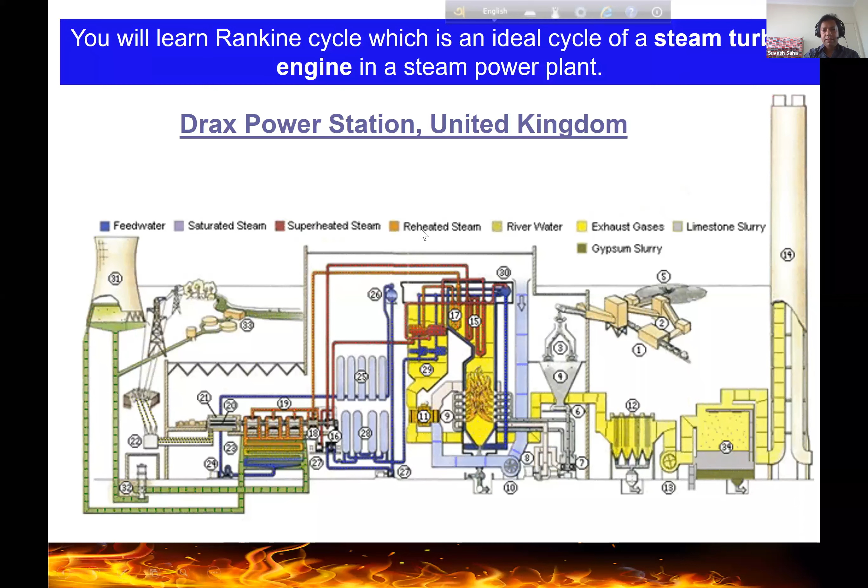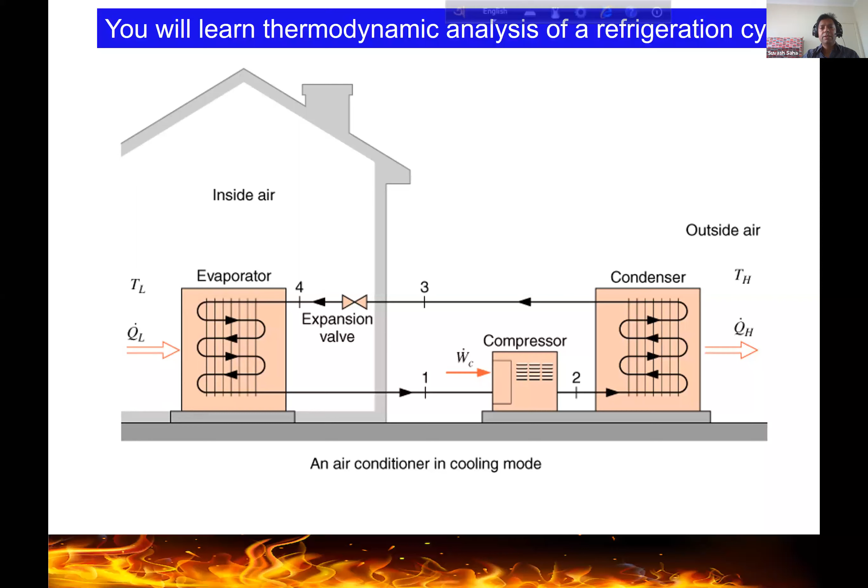After this subject, when you have finished, what will you learn? You will learn the steam turbine engine, the Rankine cycle. You will learn this system, then the gas turbine engine, the Brayton cycle. You will also learn the thermodynamic analysis of a refrigeration cycle, and the engine we normally use in cars. So these things you will learn when you finish this subject.

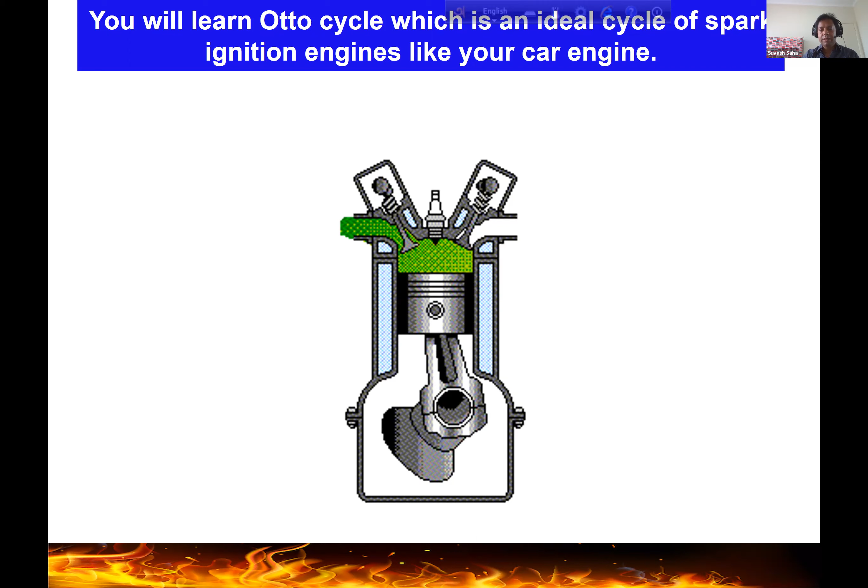Now let's talk about some assessment. The lab report has a weight of 25%. It's a group assignment on air compressor experiment. This date is not correct, it's the last year one, so I'll check it and change it. Before I upload this again, I'll replace this file with a new one. You can also find this date in your study guide, but it is not correct. So from this group assignment, you will get 25%.

There will be 3 quizzes, each carrying 15%. When you finish thermodynamic properties and work transfer, you will have the first quiz. The second quiz is on the first law of thermodynamics, and the third quiz will be on the second law of thermodynamics. The final exam will be 30%.

Sorry, I'm assuming the lab report due date is different. Yes, it is last year's date, 4th October. Ah sure, yeah, all right cheers. So not this one, I'll change it. Okay, thanks.

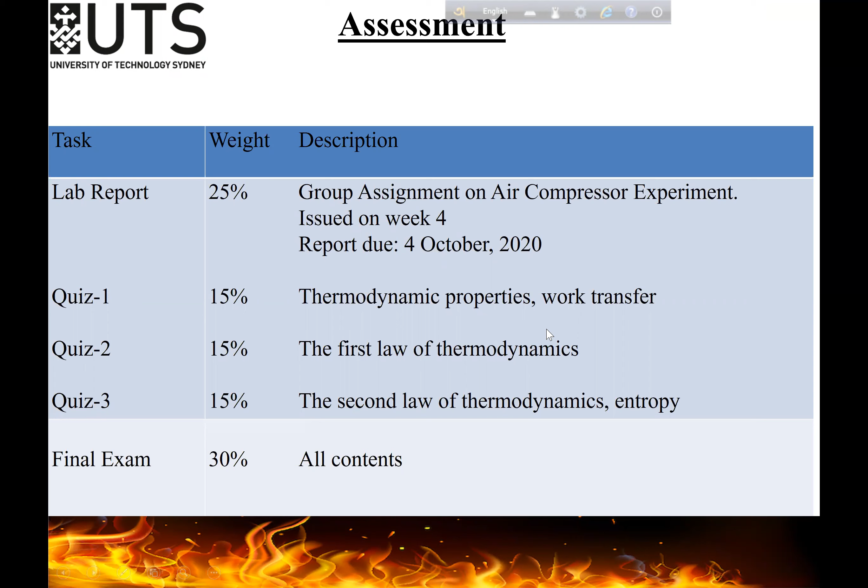Now this is the book I will mostly follow. If you can buy this book, or if you can't, this is still the book I mostly follow. Sometimes we give you problem numbers you have to find in the book, so it is wise if you can get it. I think it's the same version as last year, they did not change the edition. So if you have the old book, that's okay. Or a soft copy, if you can find one, that's cheaper. If you buy the soft copy, that is also okay. I think it's also available in the university library.

Now the objective of today's lecture. We'll introduce you to the pure substance, what is called the pure substance, and discuss the physics of the phase change process. This is a very interesting phenomenon. We actually learned this maybe in high school, but here we learn more. We'll also illustrate the PV graph, the TV graph, PT graph, and the PVT diagram. That's a bit complicated to see because it's 3-dimensional: pressure, volume, and temperature. This is actually 3D and very hard to explain, but it's easy to do as 2-dimensional, like PV or TV or PT.

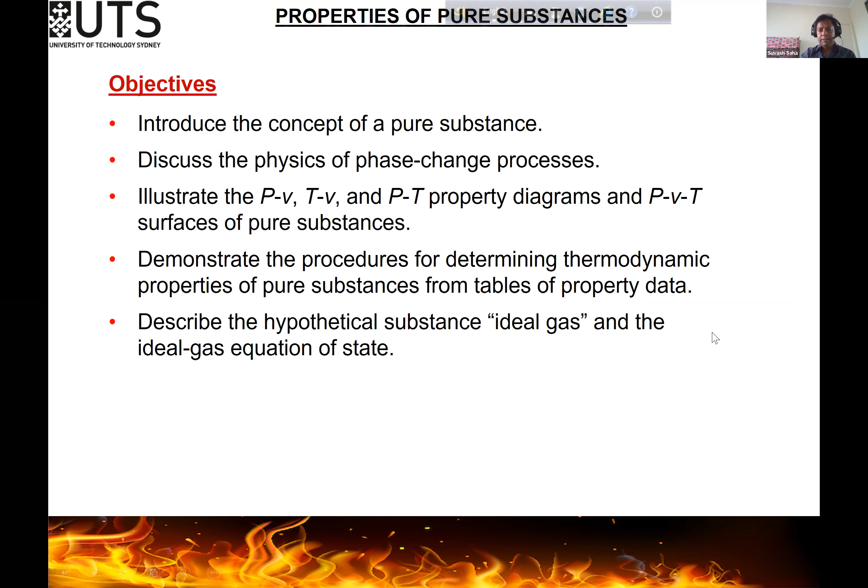And if you have a liquid and its vapor state together, that is also a pure substance.

What are you talking about in the chat? UTS email is down and I could not reset my password. Oh really? Yeah, that was me, that was for I couldn't reset my Zoom password, that's why I'm logging in this way. All right, thank you.

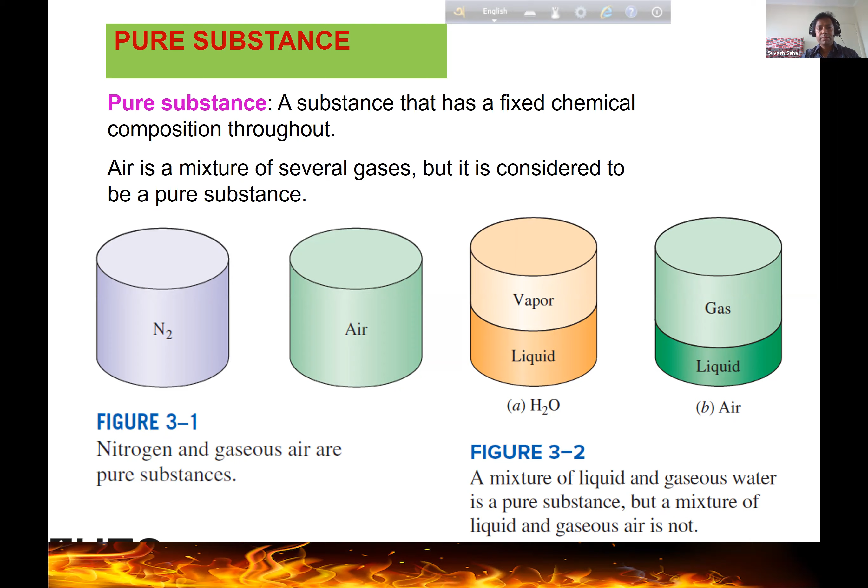Now, what are these three states? If you have some understanding of molecules, it's good, you will understand, but if not, don't worry, it's not complicated. For the solid state, take water as an example. In ice, all the molecules are very regular, organized, and close together. They don't move, just stay in the same place. That is called the solid state.

But in the liquid state, the molecules start moving slowly, though they still follow some pattern and stay close to each other. That is the liquid state.

But in the vapor state, the molecules are dispersed from each other, with no pattern, just going here and there. That is called the vapor state. So that is how molecules behave in the different phases.

If we have a little understanding of this molecular behavior, it is easy to understand, but it's actually not very tough normally.

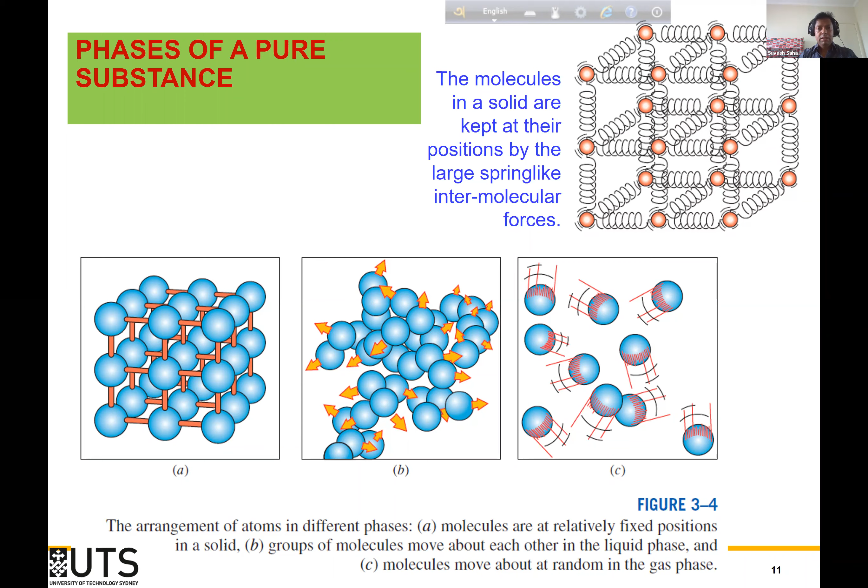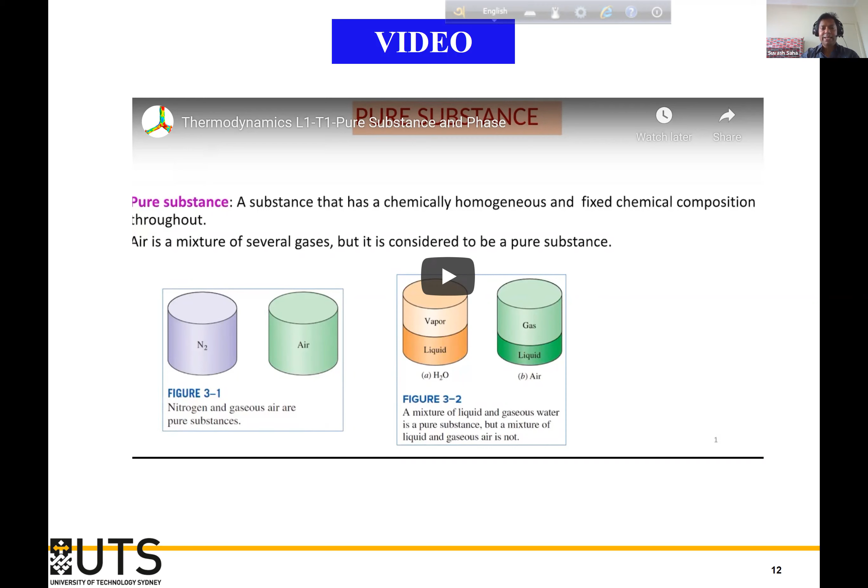This is a video of what I already told, so just follow this one. Is anybody saying anything? Okay, so you can review what I've told until now. There is a small video we created for your better understanding.

Now, next is the phase change process of a pure substance. I can give you an example using water, the total picture of water, and then focus on this.

If you consider water, what is its solid phase? Its solid phase is ice. The temperature when it changes from ice to water, that saturated temperature, is 0 degrees Celsius.

Before 0 degrees, what happened?

So that is the ice state. And if you heat it, the ice starts melting. When it becomes melting, the temperature will stay the same until the whole ice is melted.

Then it starts rising. The temperature starts rising. If you keep heating, the ice becomes fully water. If you start heating it, the temperature will rise to like 100, and when it becomes 100, the saturated temperature of water, that's when water turns to vapor. If you still heat it, the temperature will not increase anymore.

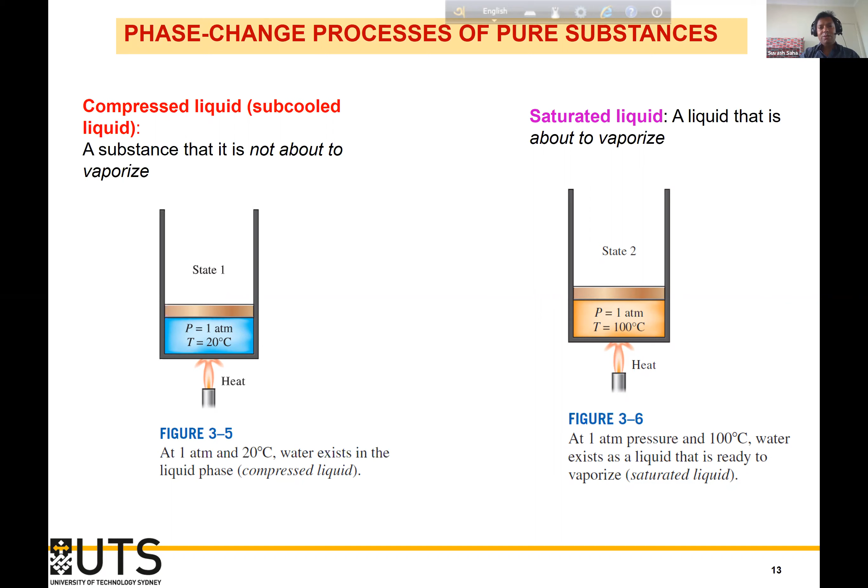So state 1 is called the compressed liquid. State 2 is the saturated liquid, when the liquid is in the terminal stage about to vaporize - that step is called the saturated liquid. Then when it starts vaporization, some part will be liquid, some part will be vapor - that is called the saturated liquid-vapor mixture, because that saturated vapor has the same temperature as the water, meaning they both are the saturated state. Then step 4 is when your whole water becomes vapor. And step 5 is superheated vapor.

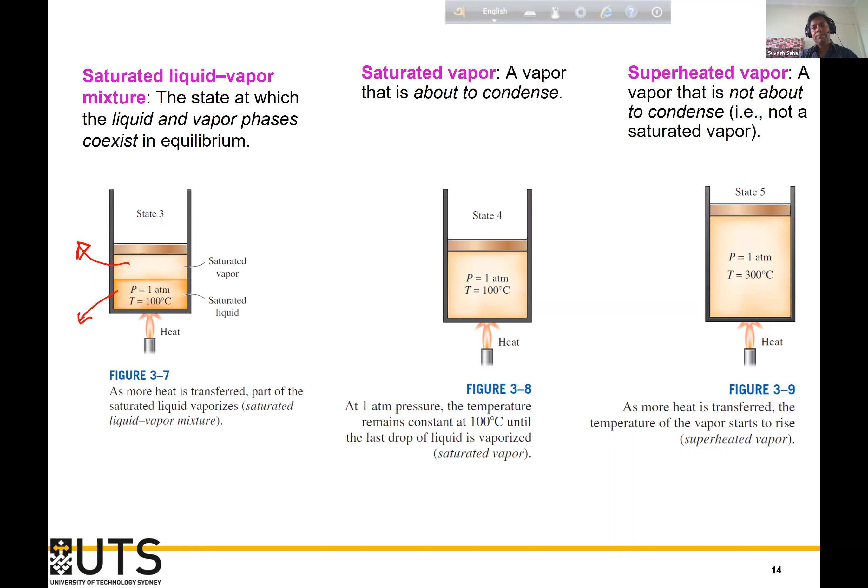This is a very nice figure, I always like this figure. You can see the whole entire process from step 1 to 5. If we reverse it, we have to cool it and we get the reverse process. So this is reversible, and we can get everything back, but we are getting huge energy from there.

Now see here, I forgot to tell you: when it is in a liquid state and you are still heating, what happens? It will actually expand. Expand means the volume increases, and that increase is a bit slow, not very fast. For example, if you have a container like this, this is the fluid, for example this is your 30 degree Celsius. But when you have like this, maybe it is 90 degree Celsius, you have a little bit more volume, so this volume increases.

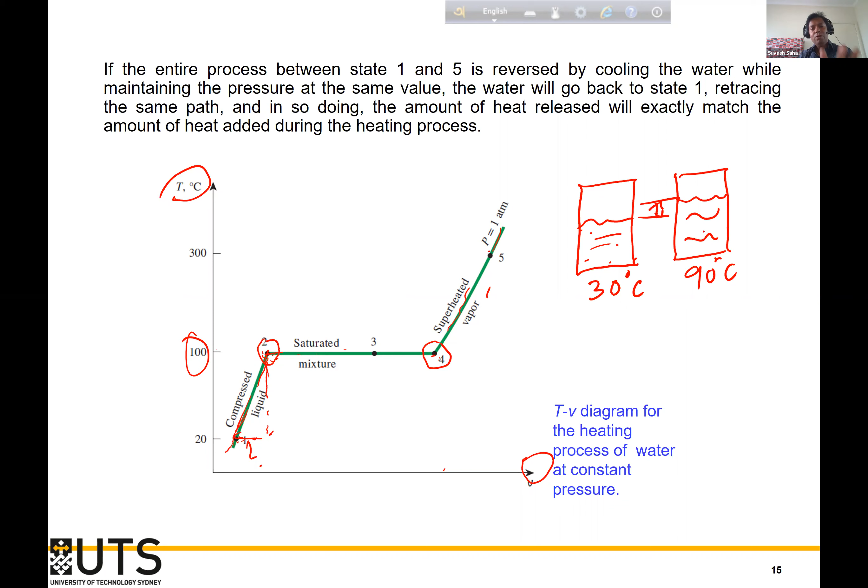I'm just repeating one more time. So here we have a liquid which has 20 degrees Celsius, and then we are increasing the temperature. It expands slowly, also increasing the temperature, going up to 100. That is the saturated temperature for liquid, and it becomes the saturated liquid, because this liquid is about to vaporize. So then it starts vaporization, and it is a mixture of saturated vapor and liquid.

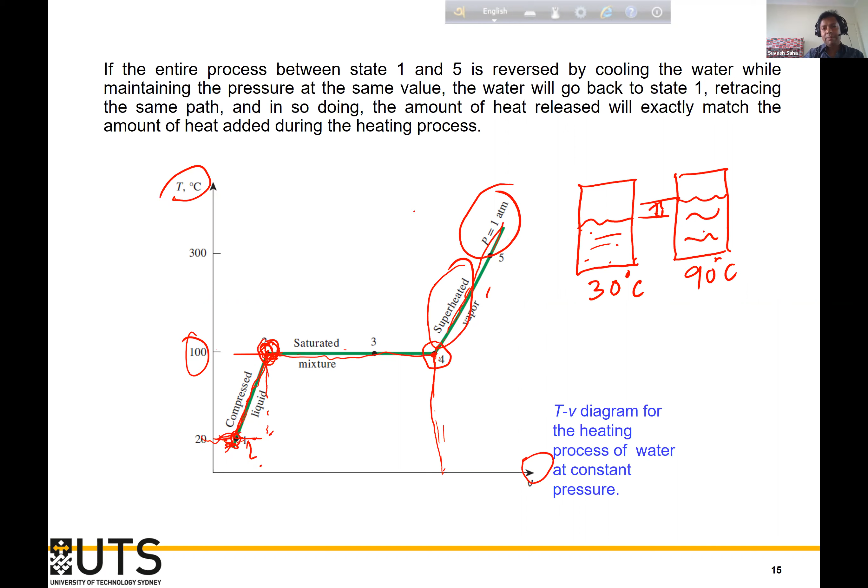But you can see everywhere we have the same pressure. We are not increasing the pressure - pressure is the same, 1 atmospheric pressure. If we change the pressure, it will be changed.

For example, here you can see the video - in the video you see the blue, and then it changes color. You can see from here to there. This is the saturated liquid, then this is the middle state, and we have the saturated vapor here, then becoming the superheated. So this is at 1 atmospheric pressure. When we are heating it, keep heating, so we are getting this.

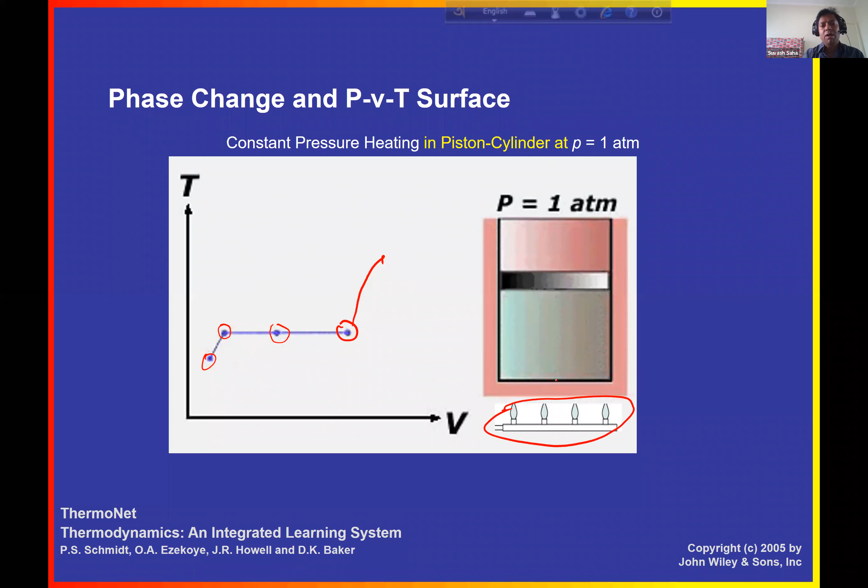But if we change the pressure, what will happen? Instead of 1 atmospheric pressure, if we give 2 atmospheric pressure, what happens? So this figure shows - this one is 1 atmospheric pressure, and this one is 2 atm. Okay, so you see the change.

Maybe if it is 100 - it's not 100, something more than 100. So if you increase the pressure, you need more heat to vaporize. The more you pressurize, the more heat you need to vaporize the water. So that is the relationship between temperature and pressure, to change the phase.

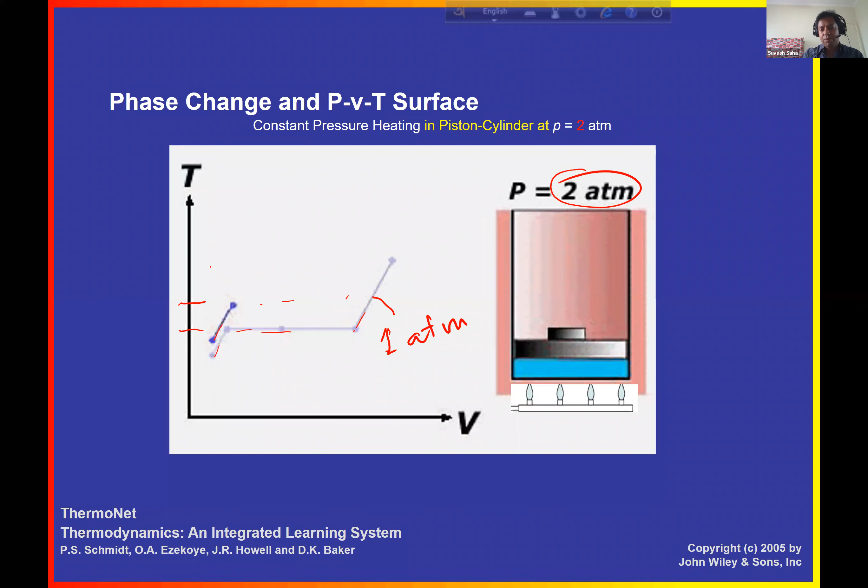So that is very important. There are a lot of other curves - I'll show you later. So this is the video of what I just told you until now. You can listen here. Let's play one and see how it goes.

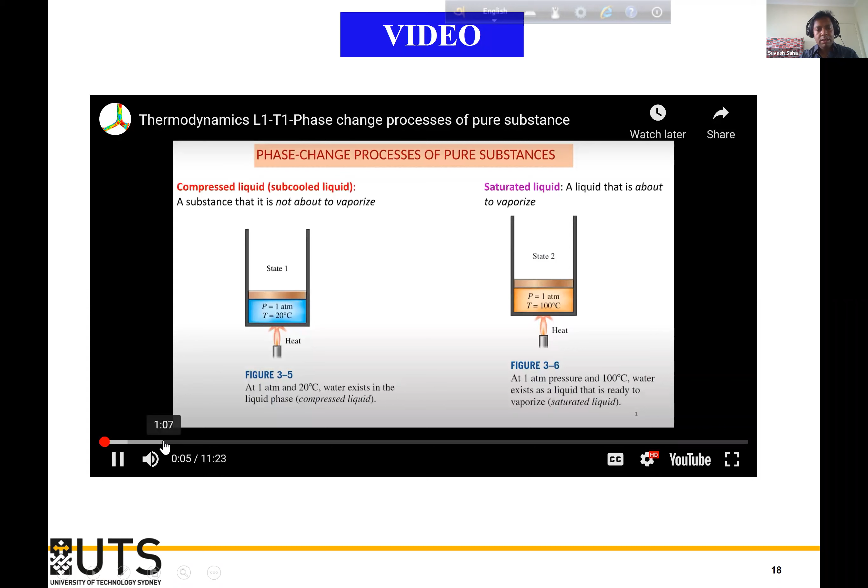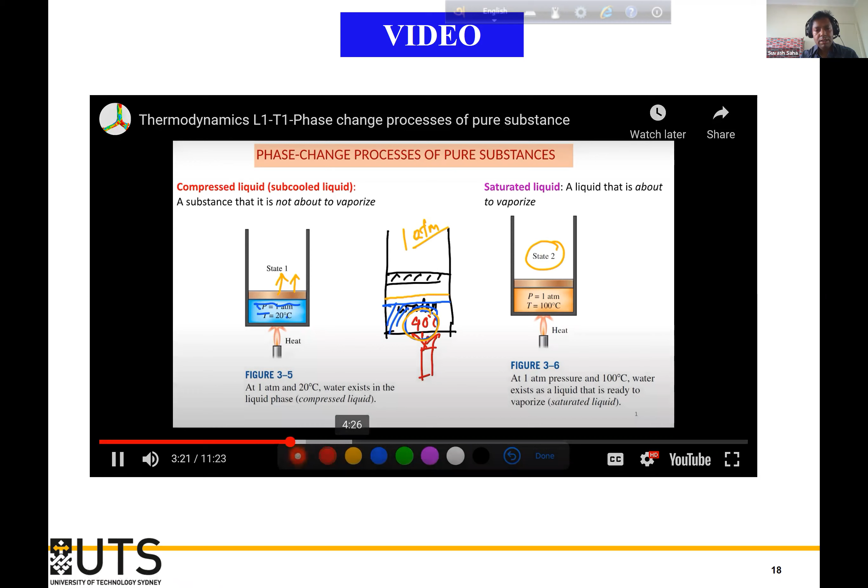All right, so that is the video. If you watch the video, you can learn what we have discussed here. You can get some more information as well.

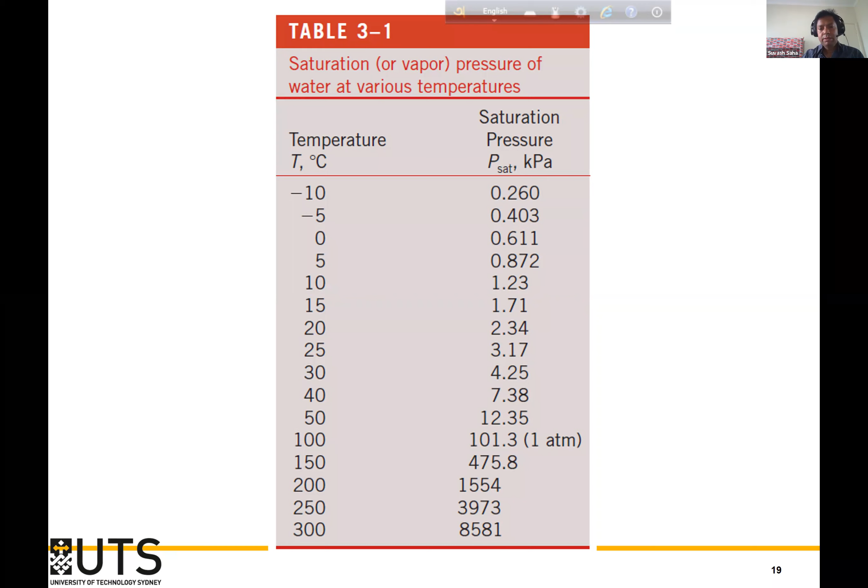Now there are some definitions here. What is latent heat? This definition is needed to calculate some thermodynamics properties. Latent heat is the amount of energy absorbed or released during a phase change process. So that is called the latent heat.

So the latent heat of vaporization, or the latent heat of fusion, from solid to liquid. That has some latent heat, and there is some latent heat. So two states have two different latent heats.

So the latent heat of fusion is the amount of energy absorbed during melting, when it changes from solid to liquid, like ice. The amount of energy absorbed during melting is equivalent to the amount of energy released during freezing. So it's the same. The amount of heat or energy it needs, and when it goes back to that state, it releases the same amount of energy.

Now the latent heat of vaporization: the amount of energy absorbed during vaporization is equivalent to the energy released during condensation. So the amount of energy it needs to convert water to vapor, you get back the same amount of energy when it comes back from vapor to water during condensation.

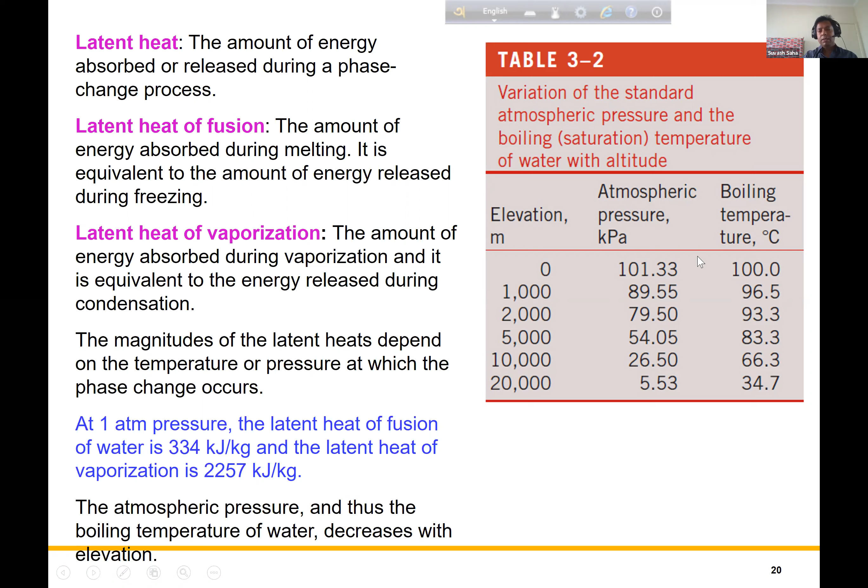Now this is the property diagram for the phase change process. I want to explain this a bit. In the vertical axis is the temperature, and the horizontal axis is the volume.

Now see here, for example, when the pressure is 0.01 megapascal, the chart looks like that. Here you have the liquid phase, here the saturated liquid, and here the mixture of saturated liquid and saturated vapor, and here the saturated vapor and then superheated. The volume change from here to there is the highest for all the pressures considered in this case. So that is the maximum volume we get for 0.01 megapascal pressure.

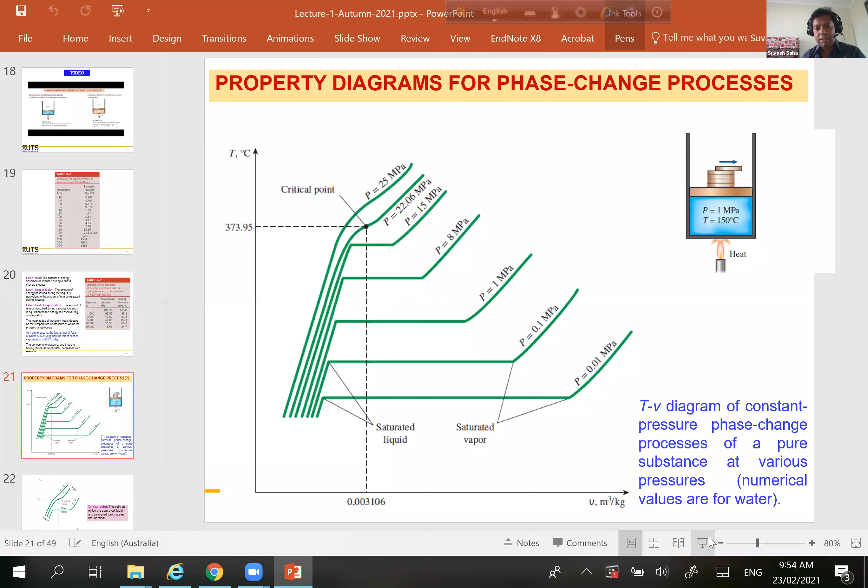So the more pressure you are giving, the more temperature you need. But at a certain point, when it's coming here, then no further volume change you are getting. Actually it's all the same state, like a liquid state. It is not changing.

So now if we connect all these points here, here, here, here, here, here, then we'll get a dome shape curve. I'll show you later on. So for pressure less than the critical pressure, if we call this one as the critical pressure, then less than the critical pressure we have phase change. But more than the critical pressure, there is no phase change.

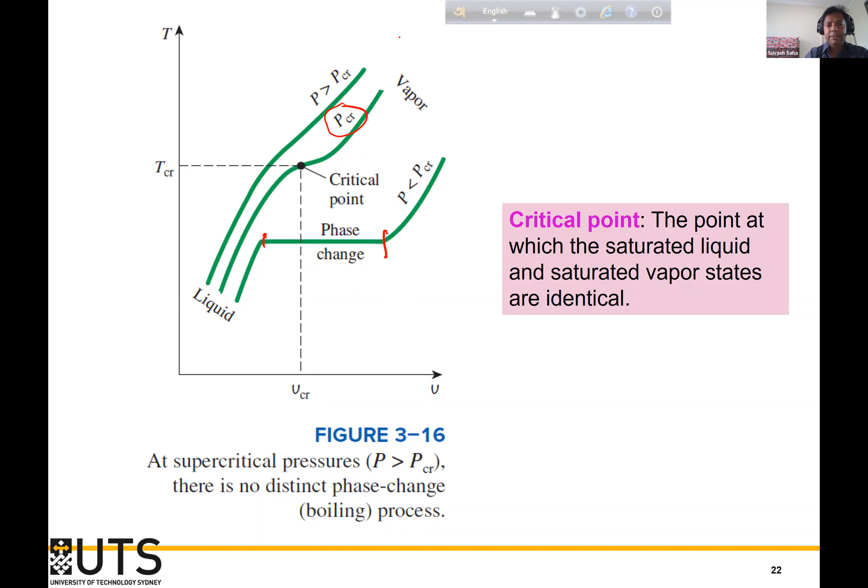The same step, this curve, and the second curve, yes, this is the one I told you, if you add all these points here, yes, so you see this is the curve. So it is very systematic, it is not very complex. This subject is not complex at all. If you follow my every lecture, at the end you will be Superman in thermodynamics. It is very, very easy to follow. Step by step it is connected. You need to just follow it. If you miss somewhere, you'll be messed up.

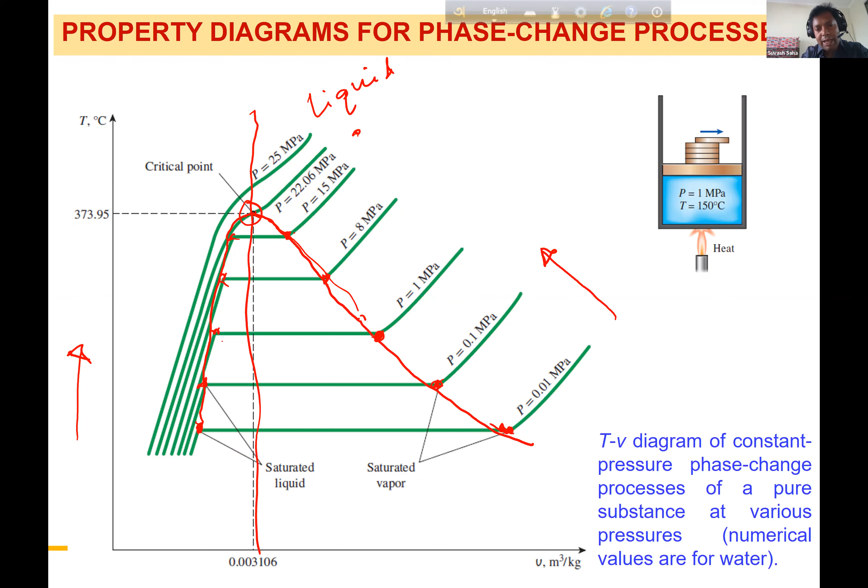So if you get this connection, then it will be easy to understand. But if you only see that curve, sometimes you will be lost from where it comes. But if you see this figure, then it's easy to understand. We can divide this part: left part is liquid, right part is vapor. But it's not all vapor, it's just some vapor, some liquid. But after this point, all are vapor. So this is the saturated vapor line, and this is the saturated liquid line.

So still we are doing the temperature versus volume curve. That means for a fixed pressure, same line, but if you change the pressure, we are getting from P1. If P2 is greater than P1, we are getting here, and we are getting here. So that means by changing the pressure, we are getting different saturated vapor points and saturated liquid points, and then we are getting the smooth curve.

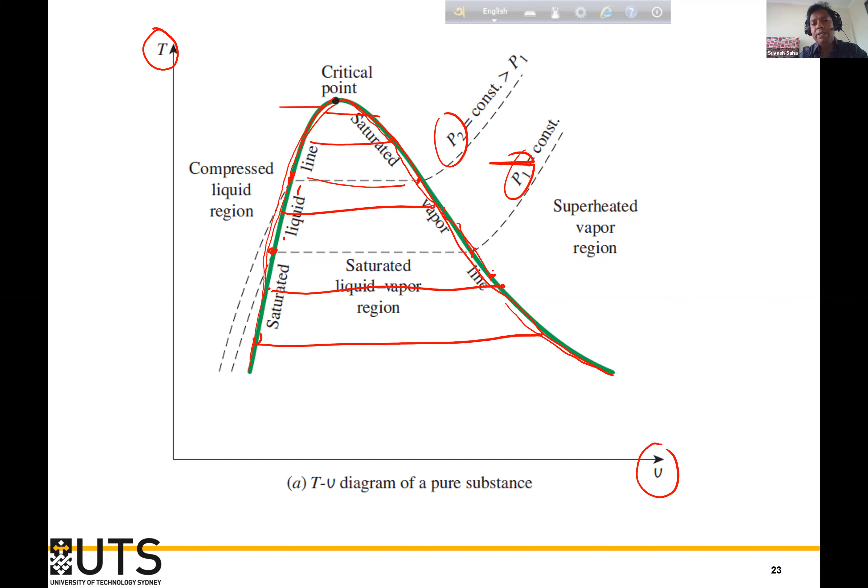So this actually, without further doing an experiment, if you have this curve, you can easily get the point based on any pressure you choose: what is your saturated vapor volume, and what is your saturated vapor temperature. You can easily calculate for different pressure. Actually, you have a table for that, so it's easy to do that. I'll show you later on.

Okay, just here I want to stop and ask you one question. Some feedback, is it okay? Am I going too fast or slow, or do you understand what I'm talking about? Do you have any comments? Can you give me some feedback?

Well, your speed's all right. Yeah, I think it's good. Good, all right. We're all here, by the way. We know you're feeling like we're not here, but we are here. Good, thank you. Now I'm feeling I'm not alone. Okay, that's good, yes it is perfect. Thank you.

Now what we'll do is pressure versus volume, so that is different. Now we'll change the temperature. How do we do that?

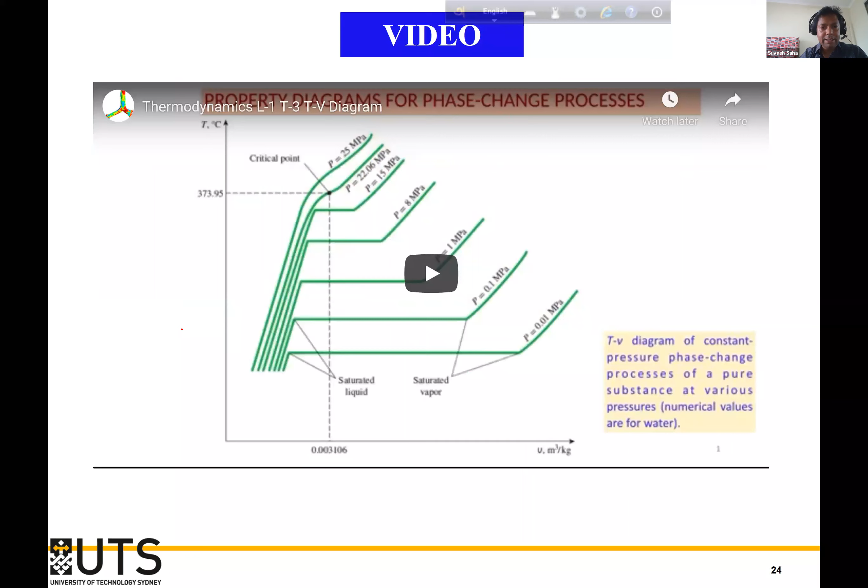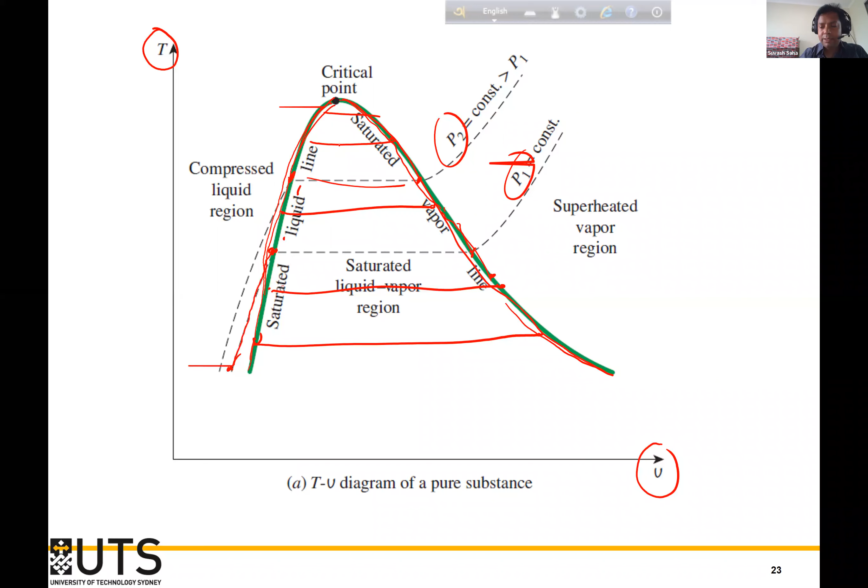So both are different, but the thing is, for the heating one, you can see - for different pressure, temperature is increasing. Sorry, for fixed temperature, the pressure is reducing. So that is the importance: if you increase the temperature, you need more pressure; if you increase the pressure, you need more heat. So that is the relationship between temperature and pressure.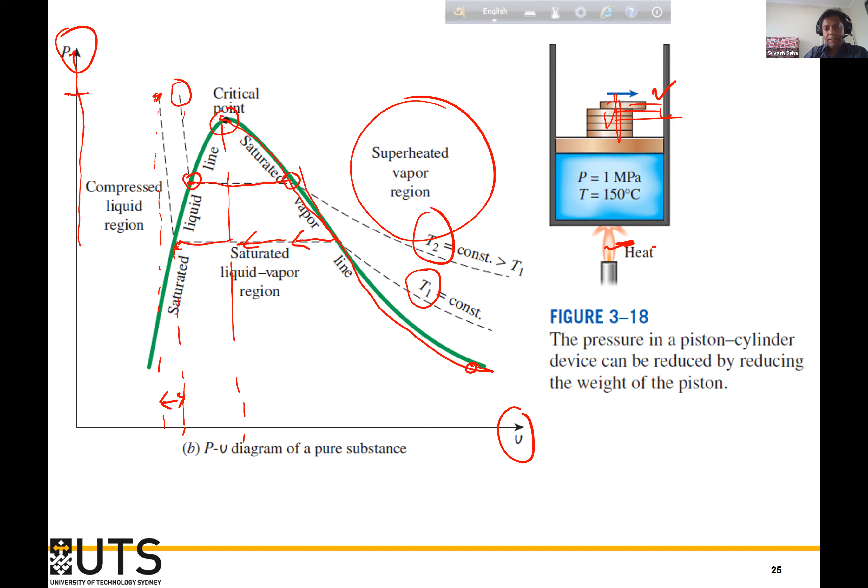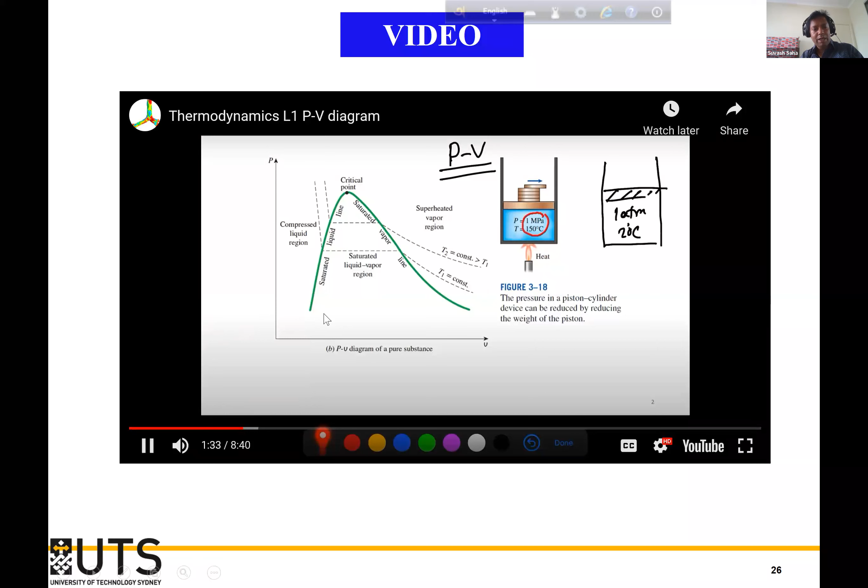Okay, and we have discussed this further here. So you can, when you see this video - I'm not going to go more into it now, so you can have a look when you get time. I split it into different sections, and we made the video.

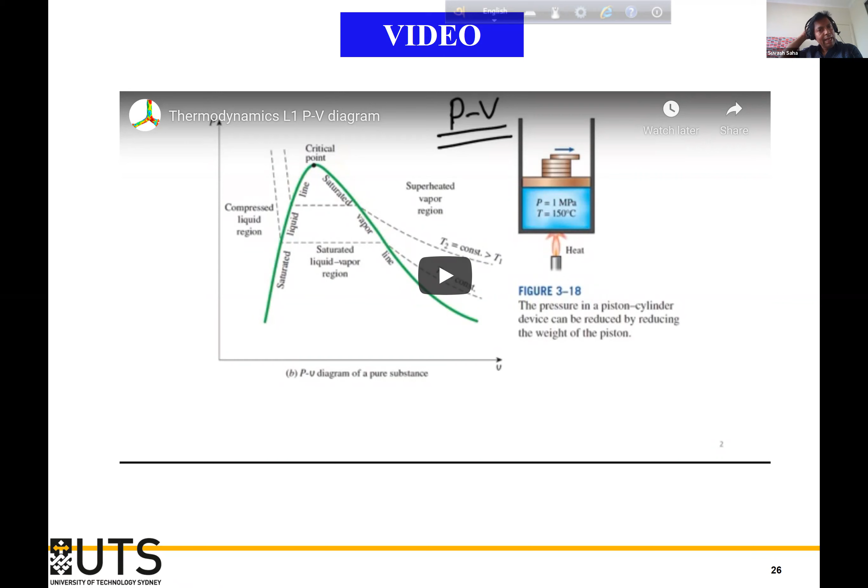Now this is a very interesting diagram, I like this diagram very much. This actually classifies all three states. If we consider, for example, water, this is the solid phase here. This is the PT diagram - that is the pressure, this is the temperature. As I said, if the temperature increases, the pressure increases, so this is the curve. That is generally the case.

But the solid - we are always giving the example of water, but there are some other liquids as well, so they don't behave like water, it should be different. But if it is water, this is the solid phase, this is the vapor phase, and this is the liquid phase. So now, these three curves: this is the curve for vaporization - above this side is vapor, this side is liquid. This is the sublimation line, the line between the solid state and the vapor.

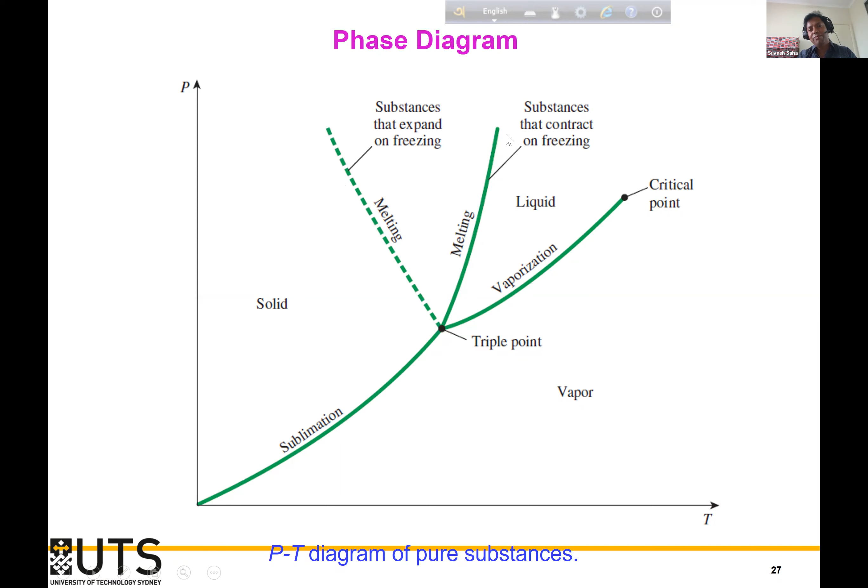Normally there are some other things in between, so it is a long one. Now what we can see: substances that contract on freezing follow this line, and substances that expand on freezing, for example ice - ice actually increases in volume when it becomes ice from water, isn't it? The volume expands. So the melting line is this. But there are some other things that actually contract on freezing, so this is this line. That is what we discussed in this video, just for this diagram.

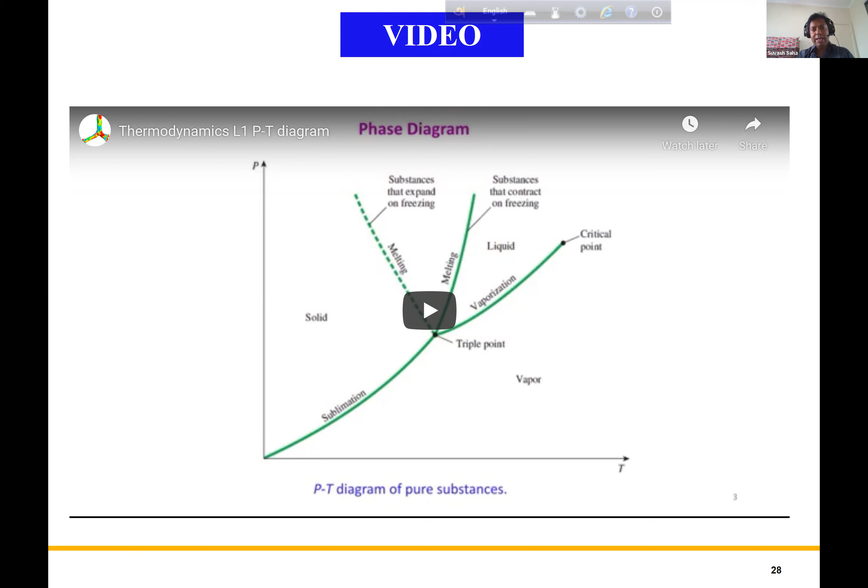Yeah, this is the most complex thing. I don't want to spend time on that because you have to have a three-dimensional mind to understand this figure. This is actually the PVT diagram all together, with the three dimensions: temperature, specific volume, and pressure. This side is temperature, this side is specific volume, this side is pressure. So what is happening here? All things are explained in one diagram.

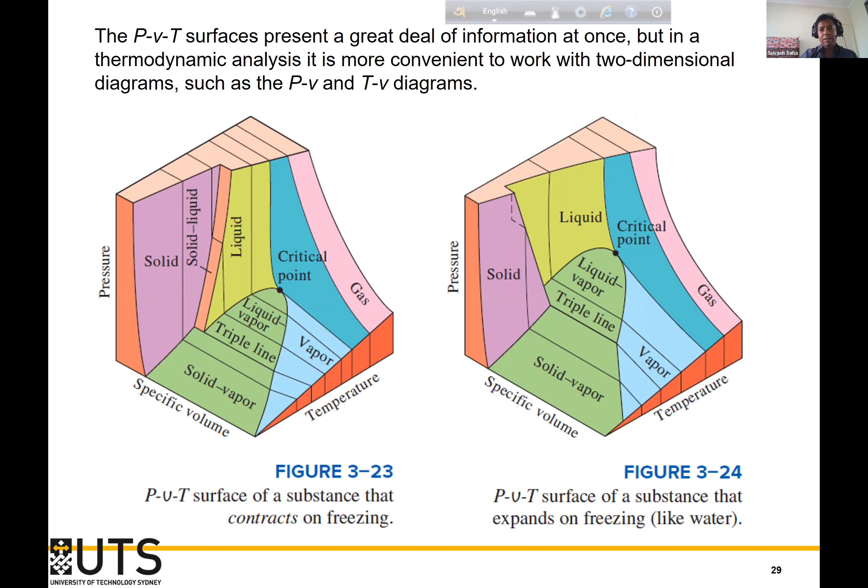I found a very nice video on YouTube and I just put it here, because they explain this in a very nice way. If you see this video, you will understand how they are doing it, it's exactly the same thing here. It was made at IIT India, and this professor explains it very nicely. That's why I put it here, if you want to understand more. But I don't think it's very important for you to understand, since 2D is better and we understand it better. But if you want to see it all together in one place, then you can see this one.

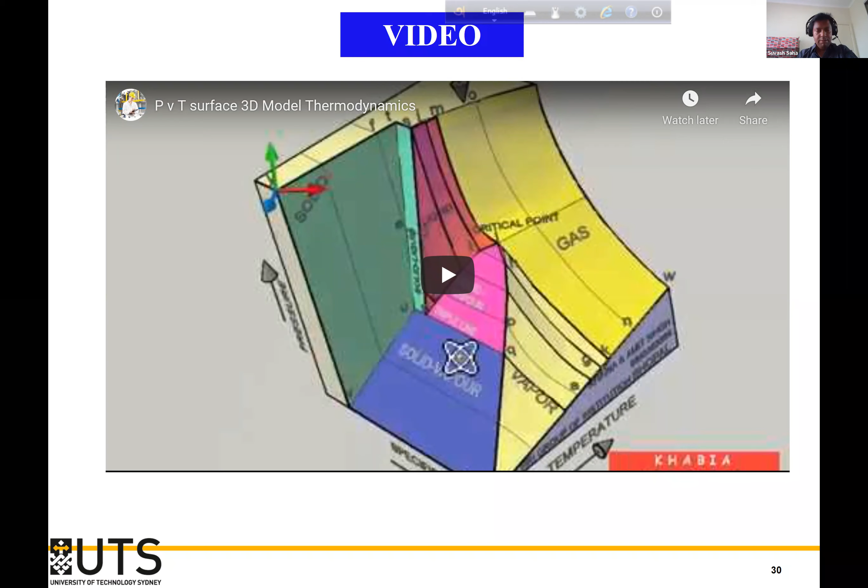Now there is another important physical property, called enthalpy. In thermodynamics, enthalpy is very important, but in heat transfer, no. I also teach heat transfer, maybe next semester you may take it. Next semester I'll be teaching both heat transfer and thermodynamics. Generally heat transfer is offered in both this semester and the next, but this semester they stopped providing it, so it will be next semester. I think most of you will take it, because thermodynamics is the prerequisite for heat transfer. So you have to finish thermodynamics, then you can go to heat transfer.

The main difference between heat transfer and thermodynamics is that thermodynamics deals with static things related to energy, while heat transfer is dynamic with time. For example, a cup of coffee: in thermodynamics, we analyze how much energy it takes to heat the coffee. In heat transfer, we don't need to know that; instead we measure how long it will take for the coffee to cool down to normal temperature. That is why heat transfer is important for that subject.

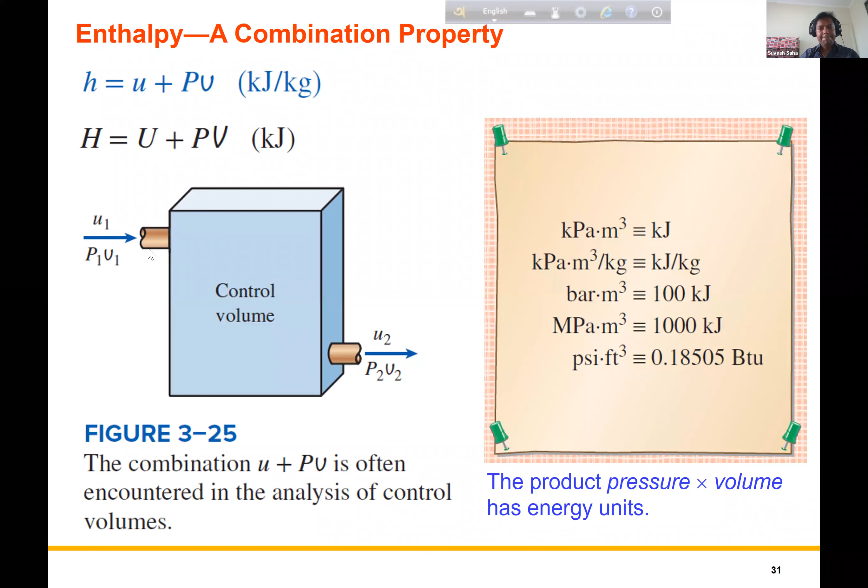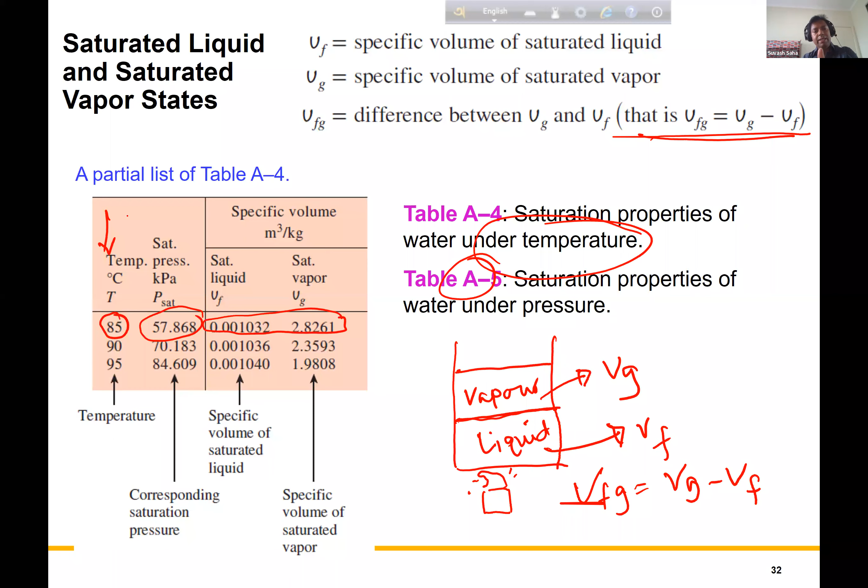Now there is another important thing for the mixture - the saturated liquid and vapor mixture - that is called the quality. This quality is needed sometimes. If you don't know the mass, then you need to know this value of the quality to calculate some other thermodynamic properties. So what is quality? Quality is the ratio between the mass of the vapor and the total mass - vapor and liquid combined. That is called the quality.

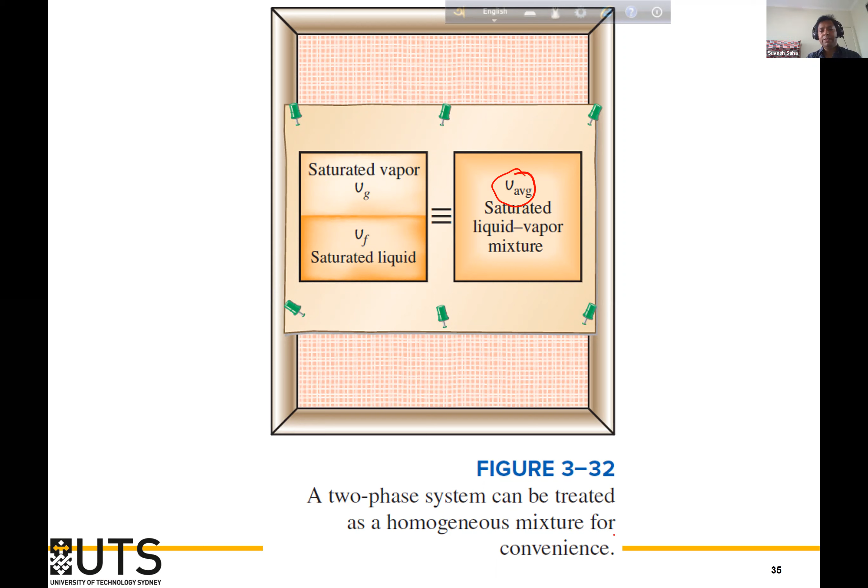So this is some math here, but don't be scared of this, it's not very tough, very easy. I'm just going step by step, then you will understand. So this is the volume - the total volume is the volume of the liquid plus the volume of the gas.

Now if we multiply by the mass, we get the total volume. This volume is the saturated specific volume, and if we multiply with the mass, we get the total volume. And the total mass is mt. And the total we can call the total saturated volume of the mixture - that's called the average volume of the mixture.

Now if we substitute this value here, we get this: Vf becomes mf times Vf, because it's a unit mass, so you have to multiply to get the total volume. We need to multiply the specific volume by mass to get the total volume of the liquid and the total volume of the vapor.

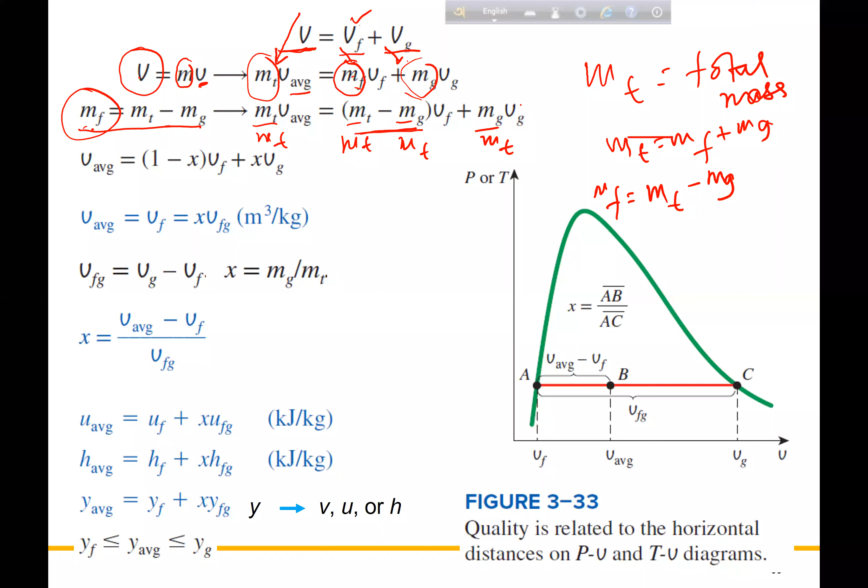Now we are putting in this value for mf, which is mt minus mg. If we put that in here, we are replacing mf with mt minus mg, getting this from here. We put it here, then it becomes this. Now, if we divide both sides by mt, this mt, this mt, this mt, this mt all cancel out. So only V average remains on one side, since mt over mt is 1, and mg over mt, that is our quality X.

So we are getting X here, times Vf, plus - since mg by mt is also X - so now it looks like an equation, right? We are converting this slowly into an equation. There's the equation. Now it should be plus, not equal... isn't it, the average...

V average, this is VF plus X VFG. You know why this plus? Because if we write this on this way, that means if we multiply this VF inside, there should be VF minus X, VF plus X VF. Now VF, and this is VG. This is VG. Now VF plus, if we take the X outside, then it is VG minus VF. Okay, the VG minus VF.

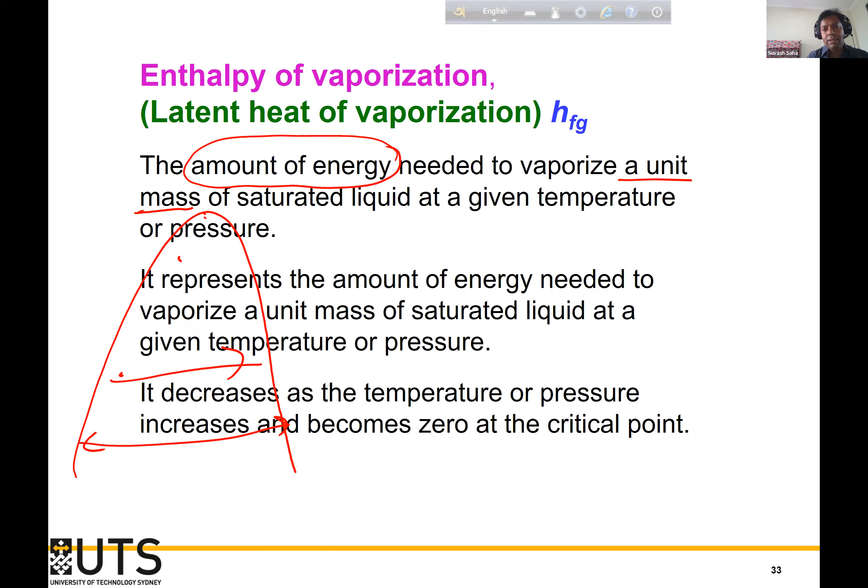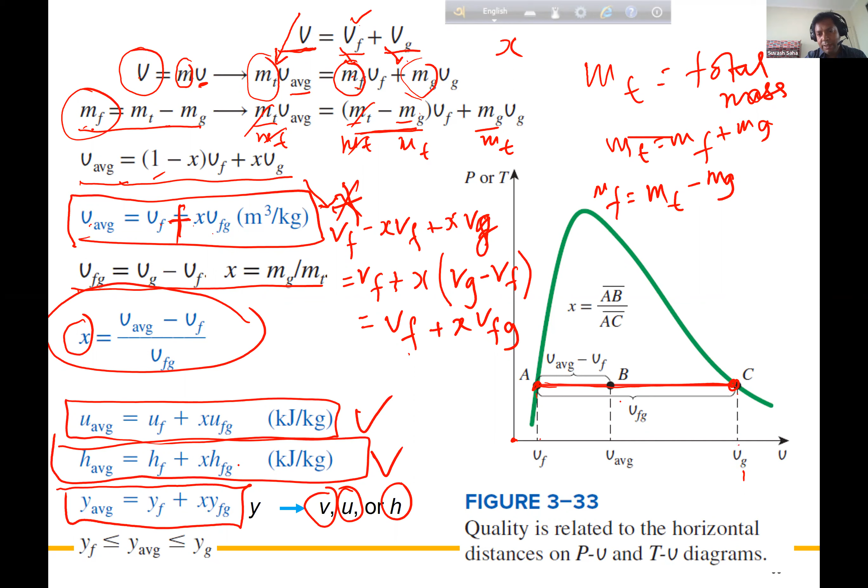All right, so this is the way, and this is the x. X is the AB, okay. So AB divided by AC. Where is C? I cannot see. Sorry, where is AB? So AB is here. So if we have average volume, it's somewhere here. So that means this is called AB, this is called BC. So that ratio, okay. So this is the ratio of the liquid, and this is the ratio of the vapor. So that is to mass. So that mass is giving us this quality.

Let me check some comments. What does letter V present? Is there any difference between the upper and lower V? Yes, upper V is the total volume, and lower is the specific volume. To get the upper volume, you multiply with the mass, and then you get the capital V.

There are some videos for this. I put it here. Now I want to solve two problems. What is the time now? 10:35, we still have some time, so we'll just solve two problems. It's a very, very simple problem.

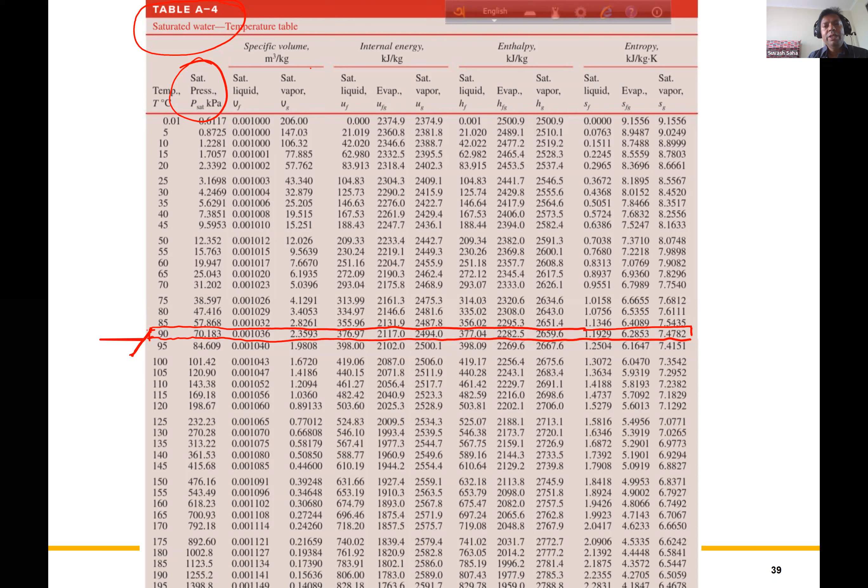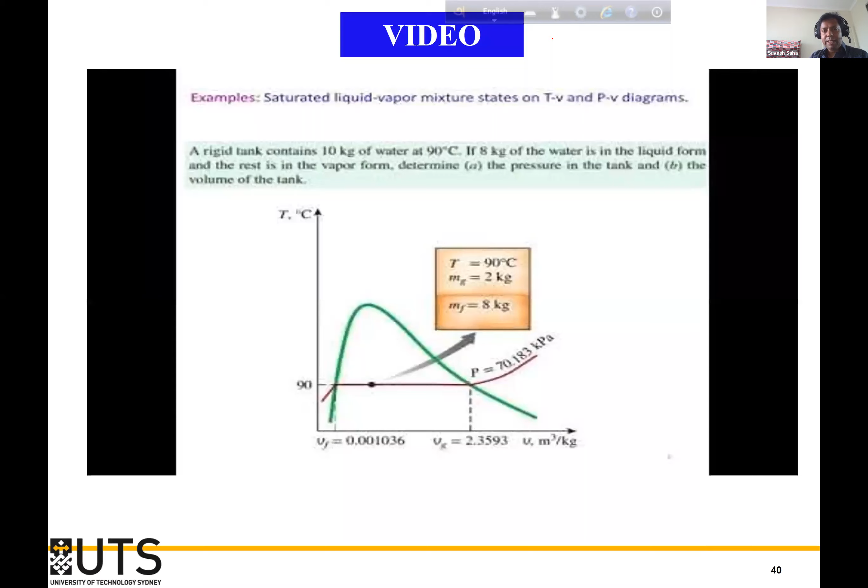We have a lot of other things like entropy, enthalpy, and internal energy in this table. So when you need any properties, we can use this table to get it. That problem is explicitly calculated here, and we actually did other methods too, using quality. If the mass is not given, we also use other approaches, so you can see this video.

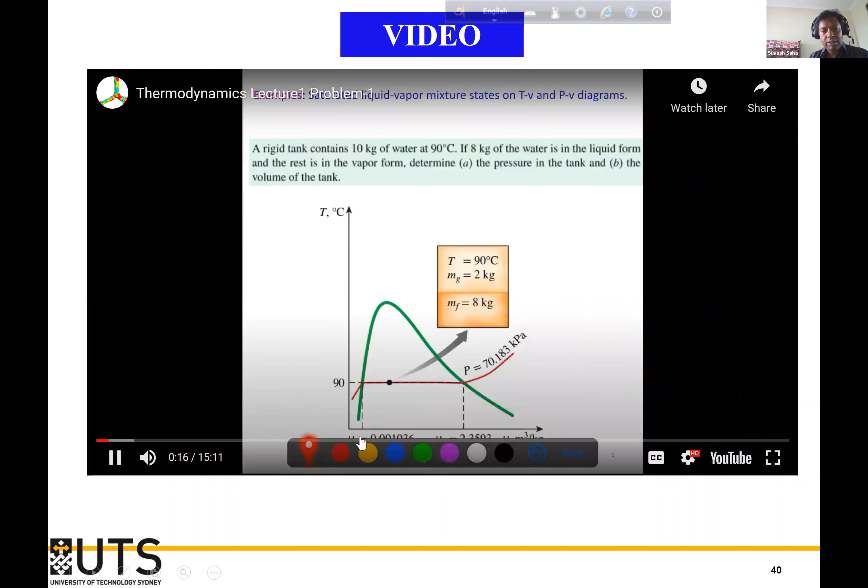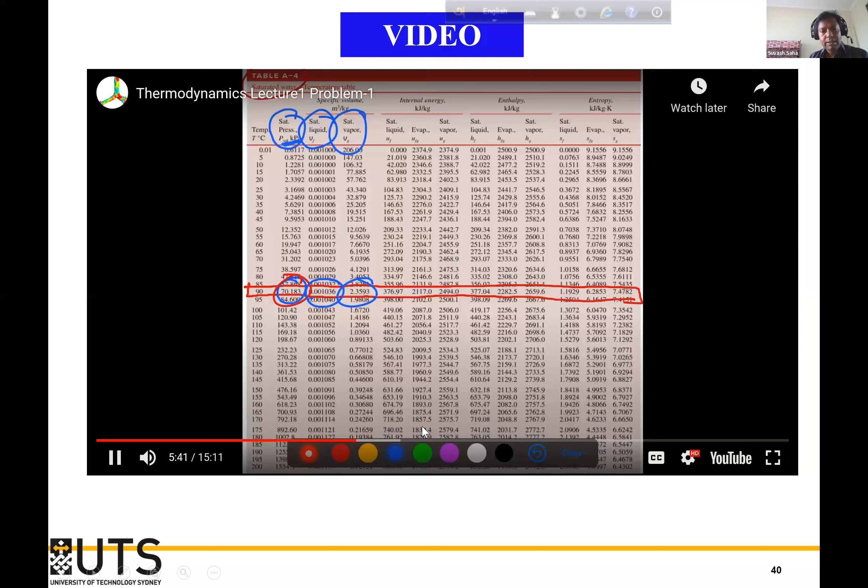In this video, we actually mentioned this method.

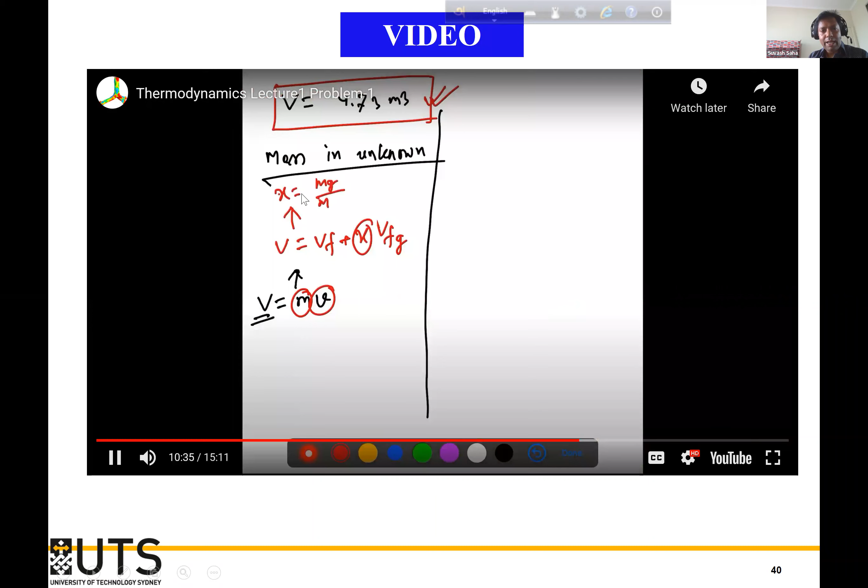So this is like this method. I'm not showing it here because that is very easy. So when you see the video, you will understand what is the another way to calculate this volume. But because the mass is already given here, so we are not worried about that.

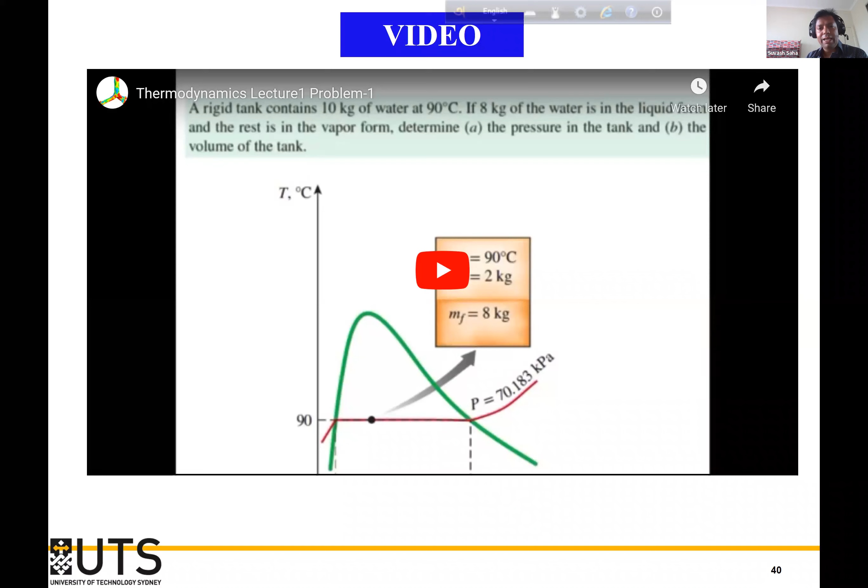So the second problem: an 80-liter vessel contains 4 kg of refrigerant 134A at a pressure of 160 kPa. Determine the temperature, the quality, the enthalpy of the refrigerant, and the volume occupied by the vapor phase. So these four things you need to calculate: the temperature, the quality, the enthalpy, and the volume occupied by the vapor.

So the vapor volume you need to calculate. Remember this one is given. So now the pressure is given as 160, and the mass is given, the total mass is given as 4 kg.

So this is a pressure versus volume curve, and you can see when the pressure is 160, this is the saturated liquid here, and this is the saturated vapor, where the temperature is minus 15.60 degrees Celsius. At this temperature, vaporization starts, even at negative temperature, because of the pressure.

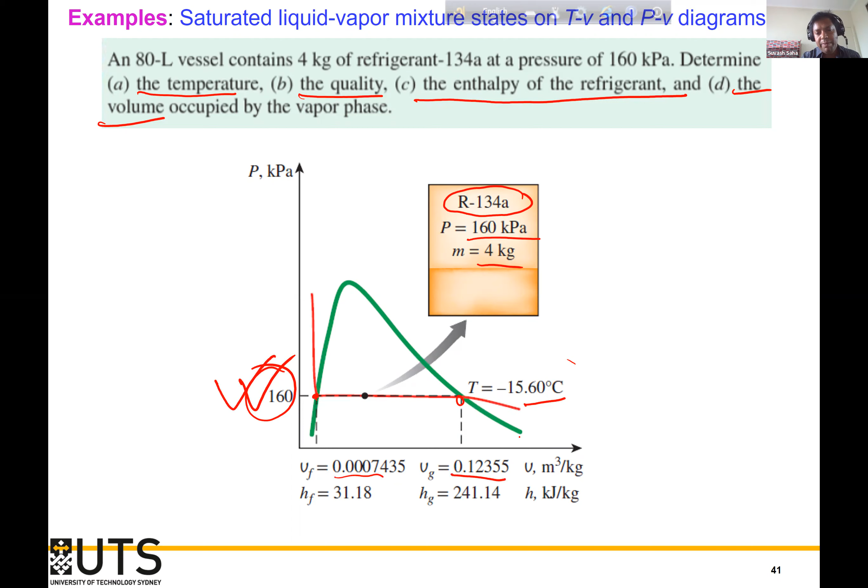Now the corresponding value of the volume of both liquid and vapor is already here. We get it from the table, or maybe it is given. And this is the enthalpy. If you go here, you can see this is the refrigerant 134A pressure table, exactly that table.

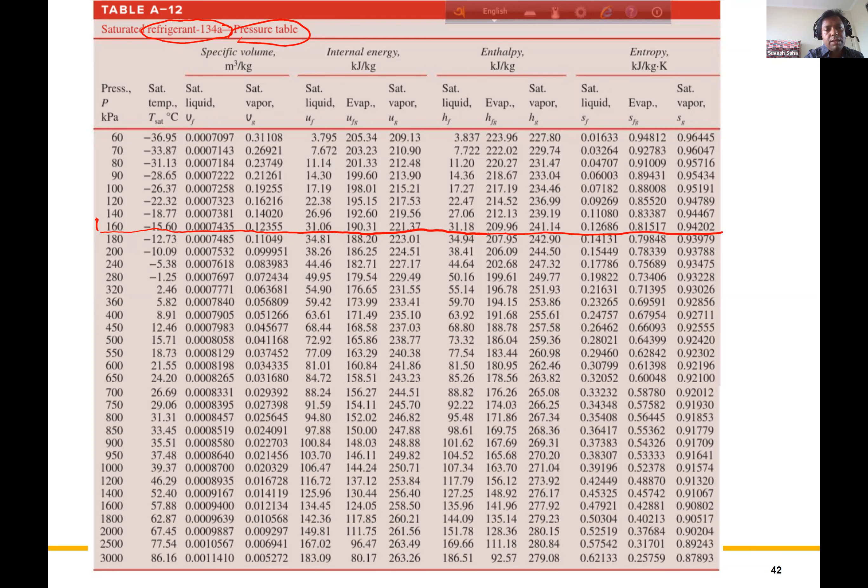So now the pressure value is 160, right? So we got the VF, VG, and also we need the saturated liquid enthalpy and the vapor enthalpy. So these two values you see here, 241 and 31. This value you can get it from the table.

Now we need to calculate the temperature at first. But before doing that, we need to calculate the specific volume. So the specific volume is small v, which is big V divided by mass.

So we have 80 liter. 80 liter means if we convert it to meter cube, it will be 0.08 meter cube, divided by the mass, which is 4 kg. That gives 0.02 meter cube per kg. So that is the specific volume calculated here.

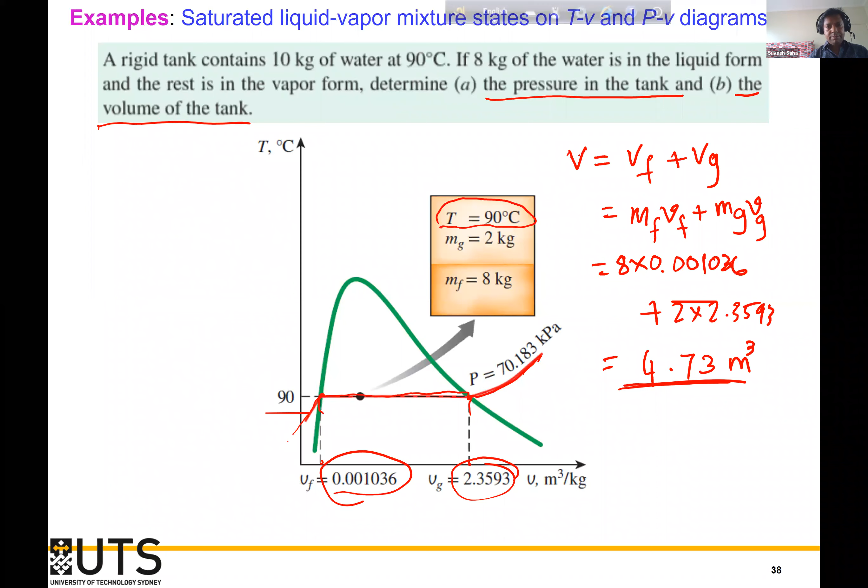So that means H equal to Hf plus X Hfg. That is also very easy to calculate because we know X, we know Hf. Hf is 31.18, plus 0.157 times. So Hfg means Hg minus Hf, right?

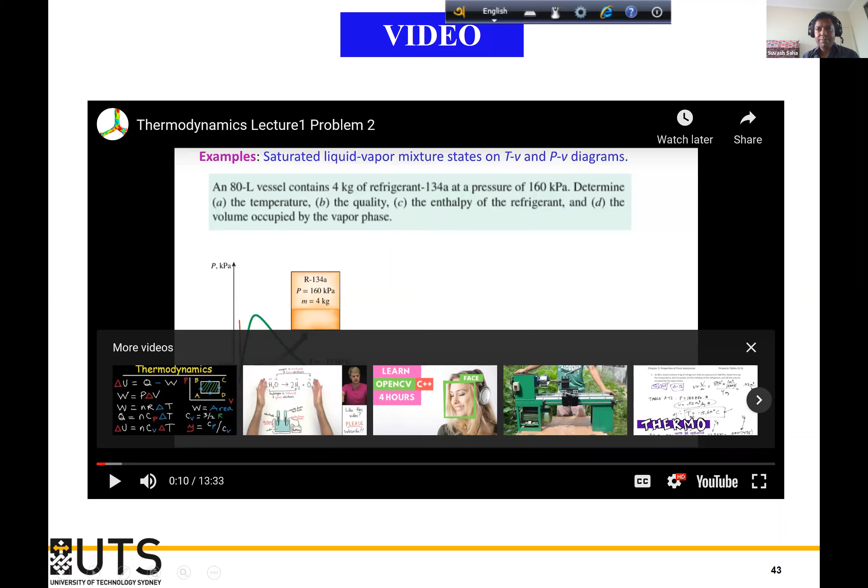We don't have much time in our hand. So there is a superheated vapor problem which is very easy, but I think that is the last one. I think I can go over it in the next lecture. This one today, I don't want to go into.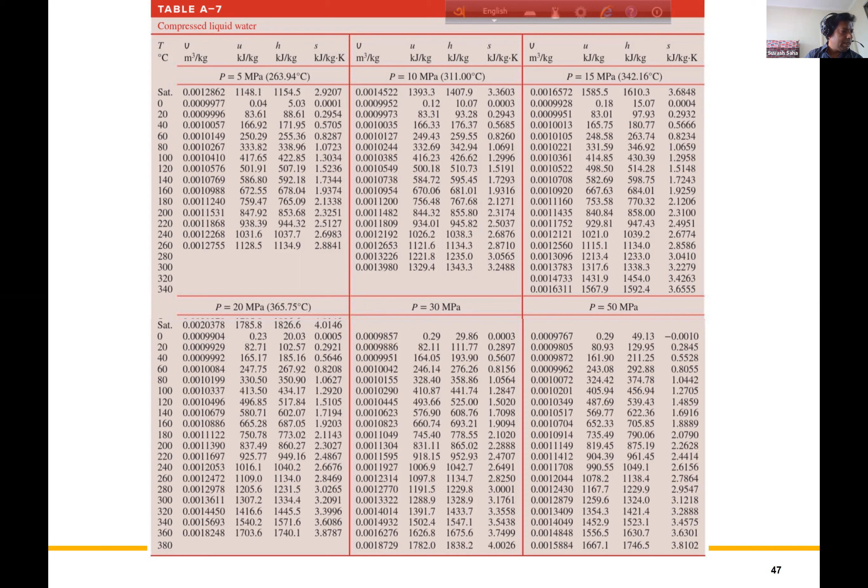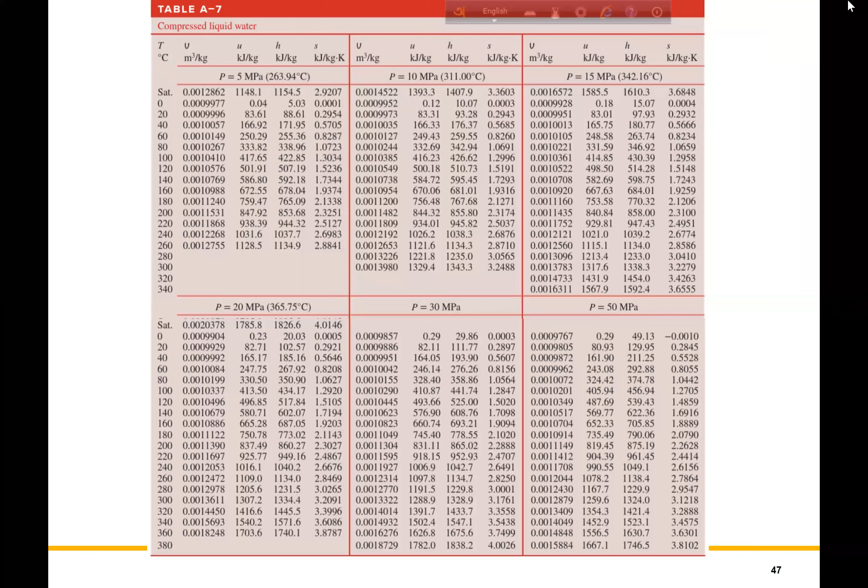That is already given, like, and how did you calculate it? Just a second, sorry, somebody asked me a question. Let me answer this question.

Will this slideshow be uploaded to UTS Online or Canvas, whatever it's called now? Yes, it's already uploaded. And there is one correction there, so I'll make a correction, delete the previous one and put it here. The deadline is wrong for your assignment submission, your lab report submission is wrong. So I'll correct it and upload it. But if you download it, it doesn't matter because no other contents will be changed, only the date will be changed. But the date is available in the subject outline, so don't worry, you don't need to see this one.

Where are they on the slide? Maybe on the third or fourth slide. Okay, so it's October last year, so you can easily see that, it's a back date. I found it, it wasn't there earlier. Okay, never mind, that's all good. It was not there earlier because I did not publish it, so now I have published it and now you can get it.

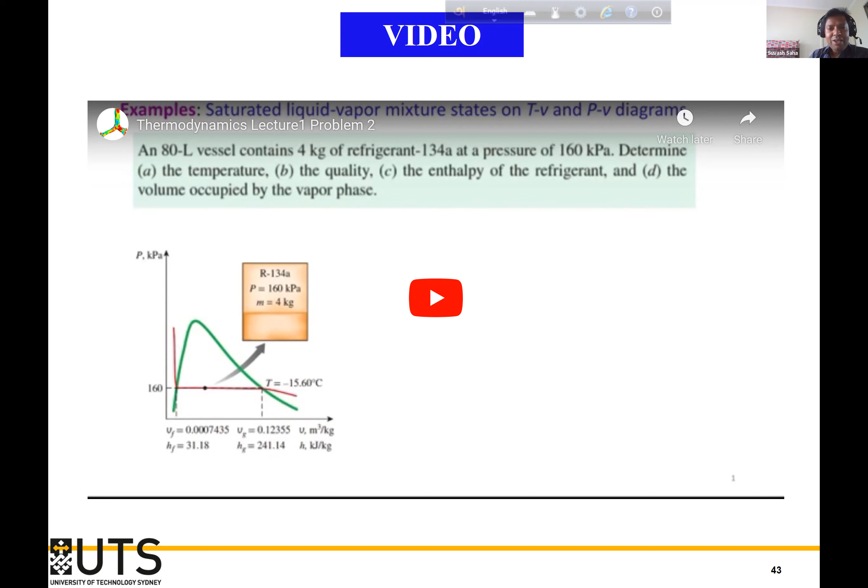Okay, I was going to show you, yes, someone asked me a question: how do we get the MG? Okay, so MG is, we are getting from... I should mention it, how should I write? Okay, I'm taking it here, okay, sorry.

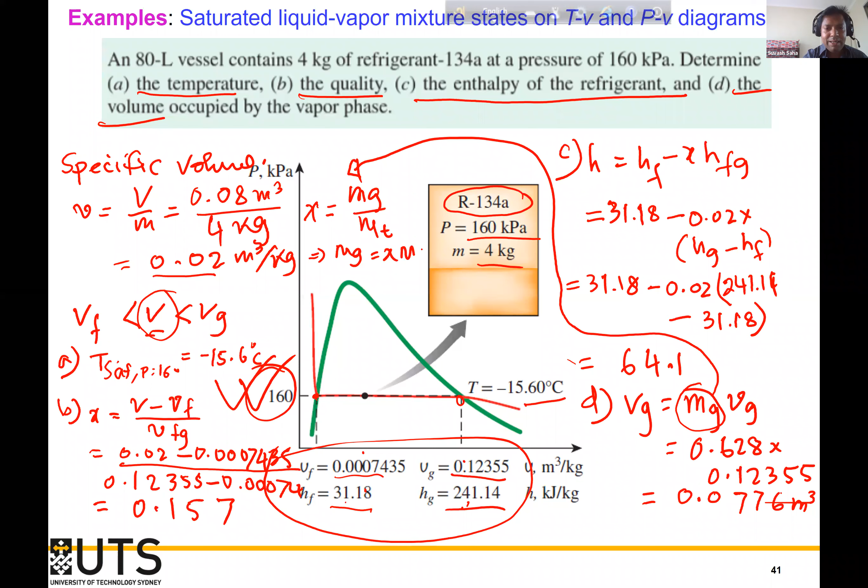So you know X equals mg by mt. Now mg equals x times mt. So now you know mt is 4 kg and you know x. X is, what is your x? 0.157, we already calculated the quality here, so we have the x here and we know the mass is 4. So that means 0.157 times 4, this is our value.

Next time when I do this math, I'll get a clean paper and then I can calculate it. It is very clumsy, so I should not do that. Next time I can do it.